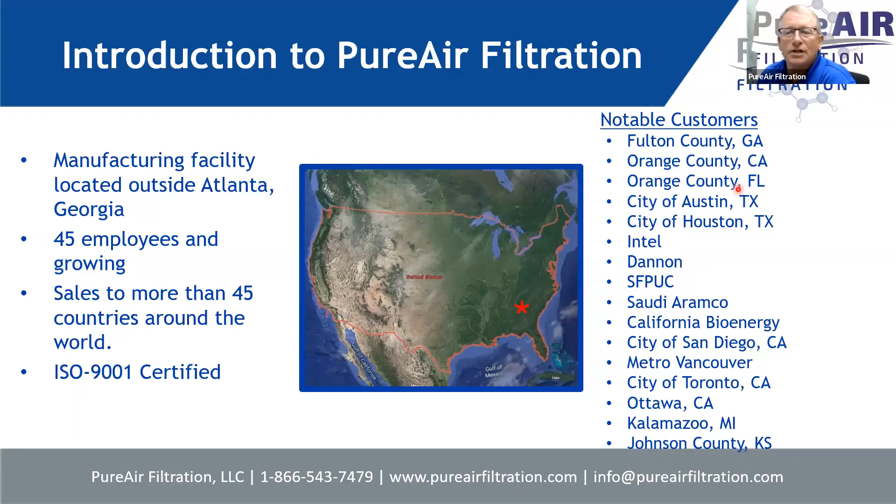Let's talk a little bit about what sets Pure Air apart: municipal applications, and we're not just odor control - we'll talk about that a little bit. We do odor control, and we do a few other things also associated with corrosion and emergency gas scrubbers.

Custom solutions - you can go from a very low flow situation, low capital costs, to some very, very high customizable systems, which we'll talk a little bit about today in the VTS unit.

Multiple families of specialty adsorbents. We do provide your basic coconut and coal activated carbons, along with many engineered carbons.

The conditioning of the air - we'll talk about that throughout the presentation. It's very important to eliminate, to take the majority of the moisture and the humidity out of the airflow. This really does help the longevity of the media.

Then there's the monitoring of the adsorbent consumption. It's another important thing to monitor, so you know when breakthrough of odors are going to happen, and it gives you chances to plan to replace the media when needed.

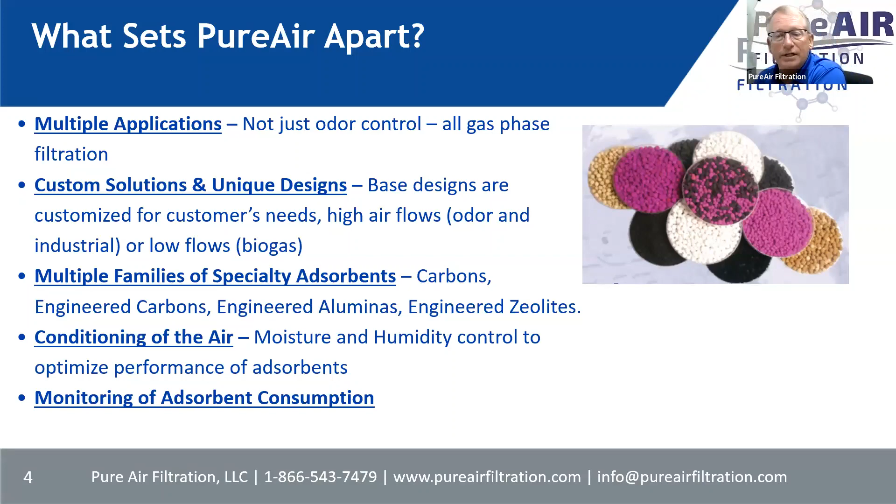Again, multiple applications - odor control, high efficiency complete odor control removal systems. We have multiple configurations. Today we're mainly going to talk about the VTS, but we also do things like emergency gas scrubbers.

Low maintenance - it uses a dry engineered media that actually turns into a harmless salt compound, because it's a chemical reaction when it comes in contact with the chlorine. Very important to have around to protect the surrounding population near the plant, whether it be a water plant or a wastewater treatment plant, and the employees of those plants.

Protecting electronics - yes, Pure Air does odor control. A lot of people think of H2S, and yes it has a bad odor, but it's also very corrosive. That's something else we do. We won't talk about that too much today, but that's how we treat H2S concerning its corrosiveness.

Indoor air quality - improving urban air. A good example is at an airport, where you don't want to be sitting there waiting on your plane, smelling airplane jet fuel. We will put systems at the intake of the HVAC systems, and it will take the offensive odors and smells out so that people inside the facility don't smell it - in this example, jet fuel.

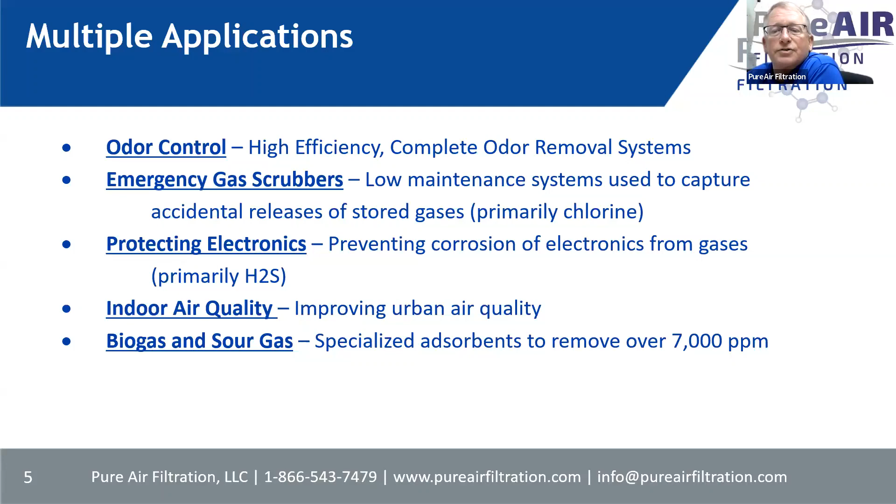As far as gas phase technology - this is in the gas phase, it's in the air, not a liquid phase where you're trying to filter certain things out of drinking water. This is gas phase: removing molecules of gas from the air is what we're talking about.

Here's some of the more common gases: your hydrogen sulfide, sulfur dioxide, chlorine, ammonia, and other VOCs.

This is an example of a media bed, and the media expires in zones. Here's where the contaminated air is coming in. Envision this is the media inside one of the vessels. You've got a spent area, an active transfer zone where adsorption or chemical reaction, the chemisorb, is taking place, handling and eliminating the odors. And then you have your unused portions. This gives you a little diagram of what's going on inside that media bed.

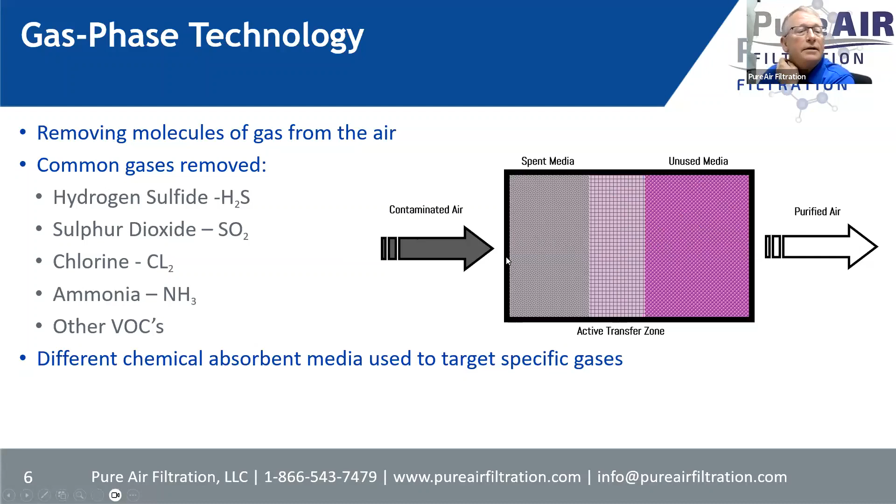Many different types of engineered medias, along with our PureAir ACX, that's our coal-based activated carbon. And here's the ACC, which is the coconut.

These are some engineered carbons where we use alumina spheres treated with potassium permanganate, whether in its pure form or blended with another type of media. This is normally what we use in what we refer to as a polishing layer, that gets rid of all the odors associated with wastewater, other than the H2S. So that's what those are mainly used for. You can see we just have an array of different engineered medias for different situations.

This is a quick visual of some carbon, and you can see again very porous. What happens here is that the odors or odor molecules literally get adsorbed or stuck into these pores.

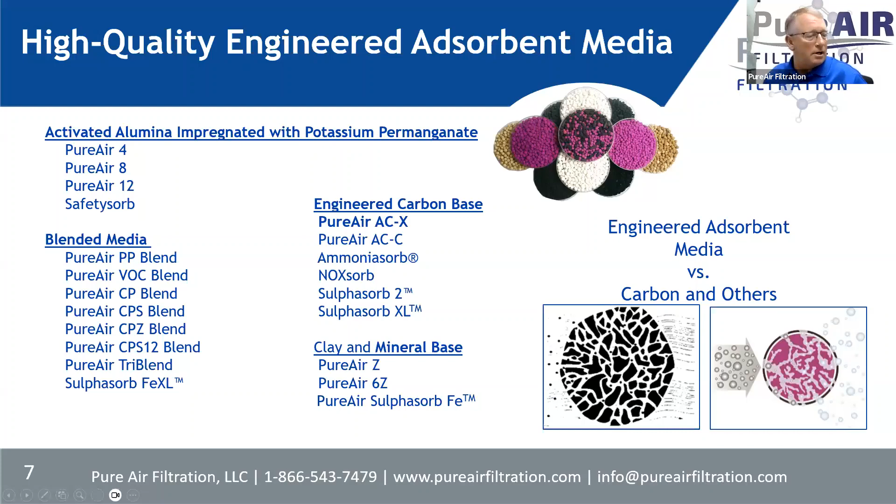This is actually an example of more of a chemsorb situation, where this is, say, an alumina sphere, very porous, treated with a chemical. There's a chemical reaction that happens when the odorous molecules go into those pores.

A little bit about carbon versus PureAir engineered adsorbents. Activated carbon is not UL approved. It treats humidity, water as a contaminant. Basically what they're saying there, those pores can get filled with humidity or water and leave less room for the actual odor molecules to be absorbed.

It is a reversible process. If you get a high temperature for any reason, or a high spike in H2S, which a lot of times is caused by high oxygen, the molecules can be pushed out, and then you end up with odor breakthrough, and that's not what you're trying to achieve. It's not the end result you want with odor control. So that can happen with your regular activated carbons.

It can be hazardous waste when spent, a little harder to get to a landfill. It can catch on fire, it has caught on fire, and it's extremely difficult to determine media life. Say at a lab, something we do here at PureAir with no cost to the customer, we send in samples, and it can be harder to test and see what kind of results with just regular activated carbons.

The advantages of engineered adsorbent medias: it is UL certified, the system is designed for a broader amount of contaminants. You can see all the different types of media we have for all the different types of gases, which can be associated with wastewater and other industries. It is an irreversible process, and it's a chemical reaction, so it chemically treats and changes the chemistry of the odor molecule, either absorbing it or changing it.

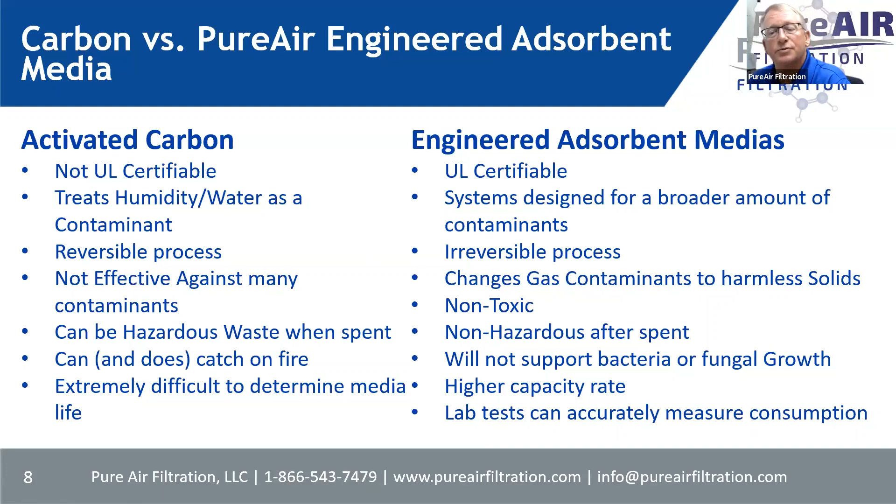This is the chart I was talking about, and it goes from everything from your coal-based carbon, which is your basic activated carbon, that's our ACX, to your coconut shell carbons. You can see the porosities, how porous it is, its ability to capture VOCs, reduce sulfur compounds, H2S, how it handles water, and then the cost per pound and the cost to actually use it when it comes to absorbing the H2S. You can see here where the activated carbon and the coconut activated carbon are great as far as being very porous.

Okay, VOC, very good, excellent. These things are great for VOC capture, but you can see where you get into some of these other things associated with a wastewater plant, the ratings aren't that great as far as H2S capture. It's just 5% compared to our Sulphasorb.

Where is our Sulphasorb? Here it is, our Sulphasorb. Again, up to 70% by weight. So you can see here we come over to the dollar amounts, cost per cubic foot. Yes, the regular activated carbon is less than the engineered carbon, our Sulphasorb XL, but the cost to maintain it and cost per pound to H2S is a lot less.

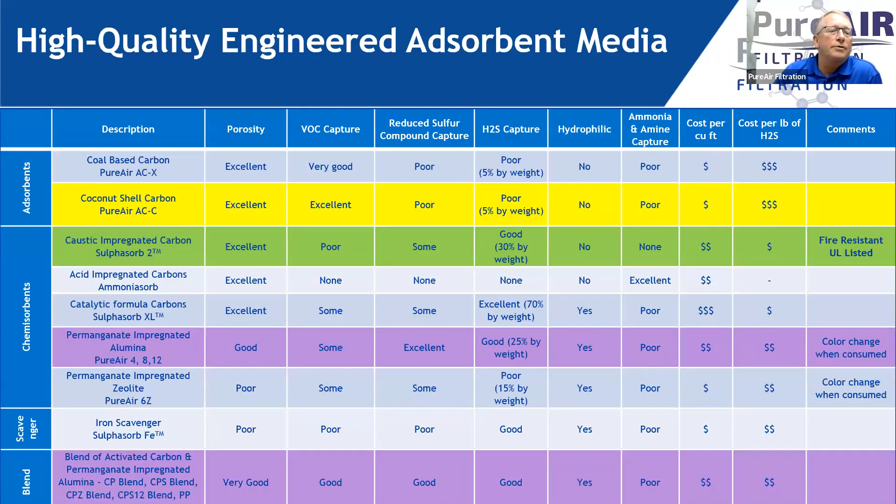So you're going to get again a much larger capture rate with the engineered Sulphasorb XL. That can equate to less labor when it comes to having to change out the media because you don't have to do it as often. So those are some other things you really need to think about when purchasing or coming up with what type of media you're going to use in your situation.

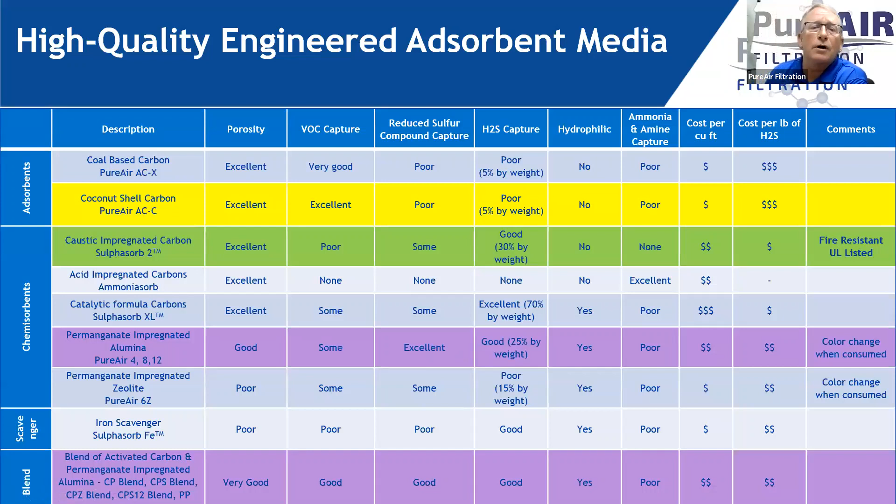But again, this goes over just talking about the potassium permanganates that I was talking about using for our polishing layer. We use the Sulphasorb for roughing, mainly going after the H2S. With permanganate and the blends, we're going after the other odors associated with wastewater. You can see that they're very excellent at the reduced sulfur compounds. That's what we're putting them in there for, again, a polishing layer of media.

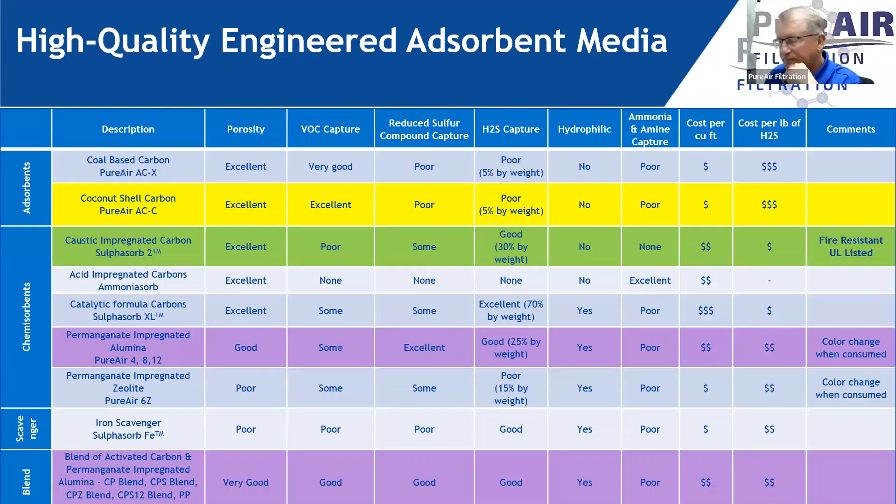All right, now we're going to get into talking a little bit about the V-bank transition system, or known as the VTS. See some top view and a side view of a system.

The systems have the highest airflow system to remove 99.5% of unwanted gases from the air. Again, you get a very large flow through these units, but then consistently still get that 99.5 and more capture efficiency that's needed and that's specified.

Also, high efficiency horizontal airflow configurations made for spaces with limited height, but again, need that high airflow. For one reason or another, you don't want your neighbors to see these tall 20+ foot tanks at your facility, and you need to handle some very high flows. That's kind of what they're talking about.

This is great for certain situations as far as the footprint of this system. It's also not as high as a vertical system would be. So safety, when it comes to working on this and changing out the media, comes into play. We'll talk about that here in a little bit.

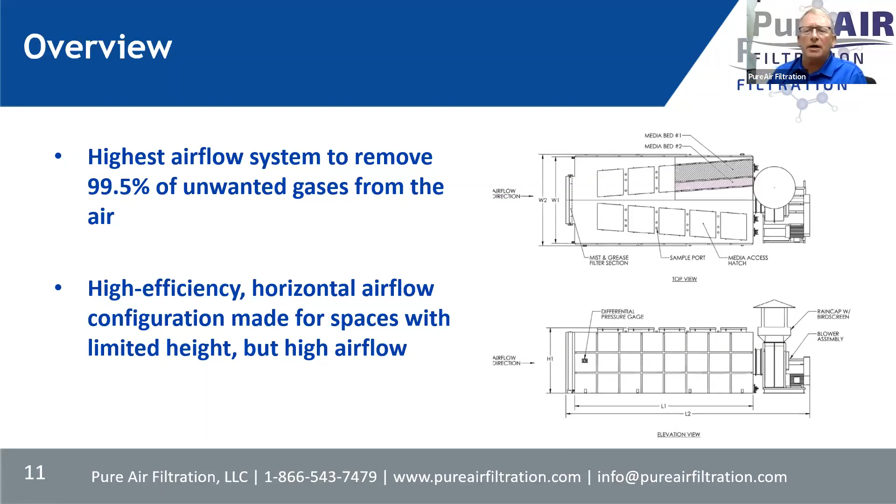Construction of materials: FRP is standard in municipal situations, stainless steel more so in industrial situations. Mist and grease eliminator is standard in municipal, but again, you're trying to get as much of the moisture and humidity out of the airflow, and the particulate matter, to increase the longevity of the media. So again, very, very important.

Then we're going to talk a little here about blow through versus draw through. We have a blow through system. I think next time I do this presentation, I'll have some actual examples of a blow through and a draw through. With the blow through system, you're literally pulling the air from the odor source and blowing it into the vessel. If you have, let's say, a gasket or dairy seal or something along those lines that's failed, you're going to be blowing out air, so you're going to get odor breakthrough, which again is not a good thing when it comes to odor control.

If you have a draw through unit, you're actually creating a vacuum through the vessel. So if you have that same air leak, say at a sample port or something like that, you're not blowing contaminated air out into the atmosphere. You're just actually pulling in or drawing a vacuum, so you don't have that odor breakthrough. That's where a draw through just seems to be a better concept a lot of the times with an odor control system.

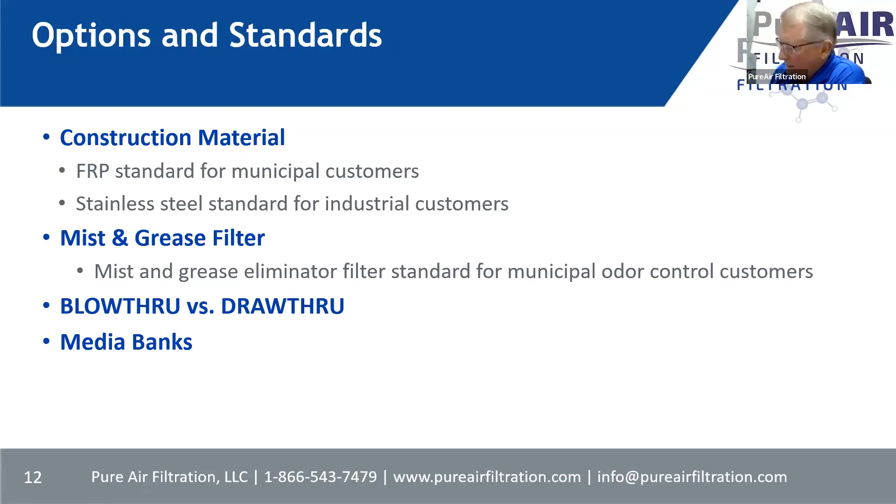This is actually a paper that was done for the Hyperion water reclamation plant out in California, done by some well-known individuals in the odor control business. It ended up being printed in the WEF Water Environment Technology magazine back in October of 2022. We'll show a little chart here in a minute, but the best choice for the situation at the Hyperion wastewater plant was a V-bank system, or VTS, or horizontal flow, high flow VTS system.

You can see here all the different kinds of technologies that were taken into consideration. There's a vertical flow single bed unit, but the problem with this one is it's low flow - you just can't get that much flow through, or not as much as needed at the Hyperion plant. Then there's a horizontal flow dual bed, but again the functions were just not quite what they were looking for, or the best footprint or best fit for the Hyperion system.

So we come down here to the V-bank or VTS unit, which is the one that was chosen for this situation. You can just see it checks all the boxes here - very high flow, compact especially when it comes to height and width of the system. Excellent as far as media life, moisture management, again due to the slant in the vessel itself, and of course the mist and grease system. Ease of changing out the media is very, very important, and good access to it - those kind of go hand in hand, very simple.

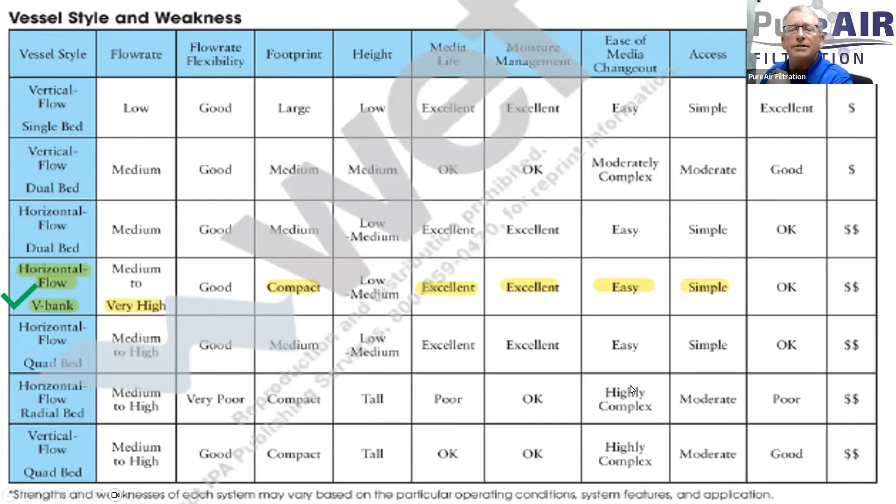But if you go down here to some of the other technologies that can handle the high flows and were candidates for this type of situation, you've got your radial flow, and you check out a lot of the boxes here - high flow, but it's real tall, 20 plus feet tall. You're not always good neighbors, you might not want that situation. Coming back to media changeout, it's highly complex because with radial flow the media bed is as long as the system is tall, so it's a lot harder to change out the media. But again, this paper did a study of all the different systems, and this one checked all the boxes for this very high flow situation and footprint at the Hyperion plant.

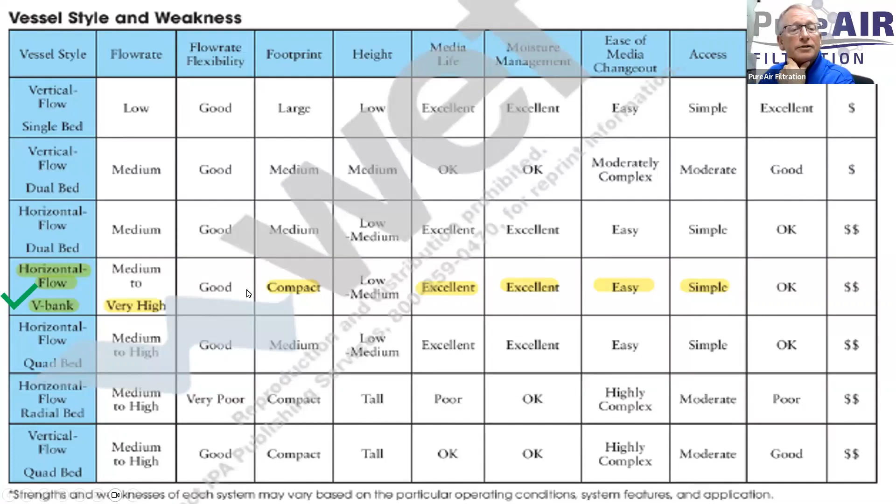The benefits - let's see, benefits as far as airflow. We've been talking about it already, but the ability to reach high airflows, standard units up to 42,000 CFM. It does not require air to - basically talking about the angle that it goes through the system. A lot of systems take almost a 90-degree angle from the blower to the inlet, then up through the media and up to the exhaust. With a gradual slope of the V, it's not as much of an angle.

Vastly superior to radial flow and dual bed vertical beds, just like I showed on that chart - kind of the reasons why. But those are usually your other candidates when it comes to very high flow wastewater odor control systems.

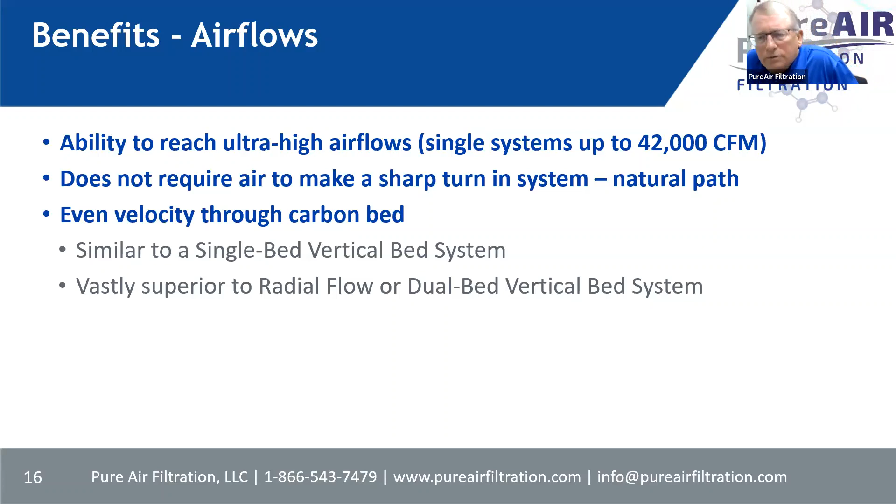That's the benefits again due to footprint. I know the mist and grease is basically built into the front of the system, so you don't have the mist and grease protruding out, which is nice. These systems basically come on what I'll call an integral skid, so everything can really be put into place, and then you can just connect the incoming ductwork. It's very easy as far as the footprint of these, the installation.

Again, the V-bank transition systems are engineered for tight areas - big cities, or we even have situations where they bury these things underground so they're not seen, out of sight out of mind. No side access needed, which allows you to bring the units closer together because you don't have to do any maintenance or need access to the sides of these systems.

High efficiency horizontal airflow configurations for spaces with limited height, but very high airflow - whether it be you're trying to be a good neighbor and you don't have people complaining about seeing these new big tanks down the street. That's one of the many reasons. Again, it's a footprint issue.

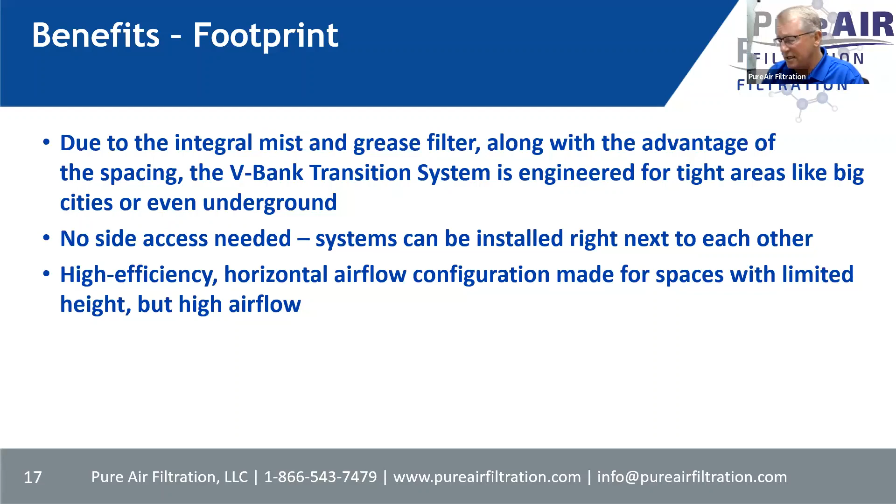Okay, so let's see. Benefits: broad range odor removal results.

Very customizable, I've already talked about it a little bit earlier. If you're in between flows, we can customize these systems by extending the length of the bed or extending the height of the bed. That's what they're talking about here.

Able to take out contaminants, not just one gas. Also, the beds, we have the ability to put two different types of media in the bed.

Like I was talking about earlier, you might have a roughing layer of media, like our sulfurs or high H2S capacity carbon, engineered carbons, and then on the next layer would be a polishing media to get rid of the other gases associated with wastewater. That's what they're talking about there.

And this is between what I was trying to say earlier, between standard flow ranges, we can customize these systems to fit those flow ranges.

Again, the high efficiency mist and grease. It is very standard in our systems to protect the media, gives particulates and moisture, and just prolongs the longevity of it.

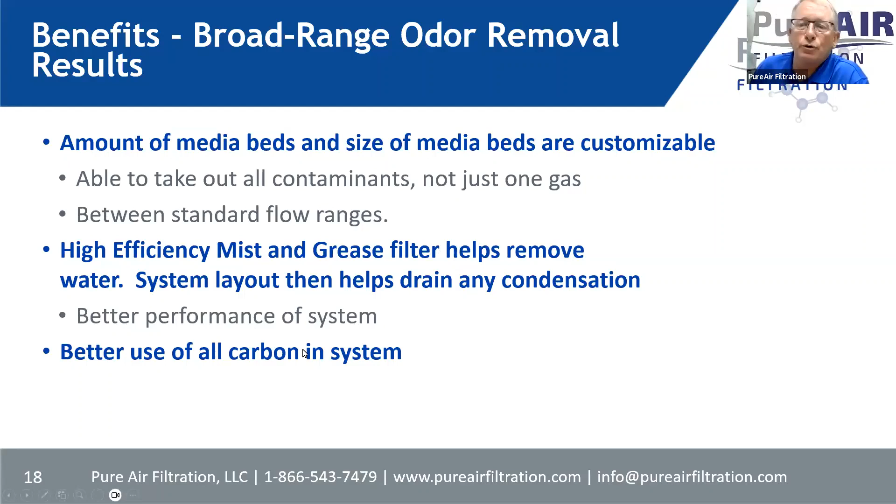So again, better performance of the system, better use of all carbon in the system. Again, very even flow through those V's, which allows for this.

Maintenance. Again, this is a big advantage with the VTS units. Due to the height, due to the flat surface on the top of this vessel, it's very easy to get around on and to maintain.

This is just talking about changing out the media, and it goes through the steps: shut down the system, connect vacuum truck to the quick connects at the base of each media bed, which is very easy.

Again, you don't even have to get up on top of the unit, just connect to the base of the carbon bed or media bed with the quick connects that go to the vac truck. Vacuum until carbon no longer exits. Repeat for the other beds.

Another nice thing about this system is that any remaining carbon goes into the fill chute. So really you have two options when pulling the media out: vacuum the media out of these systems, or fill media through the fill chutes.

Again, getting up on this unit, it's a nice flat surface, as you can see by the previous drawings of it. Close the lid.

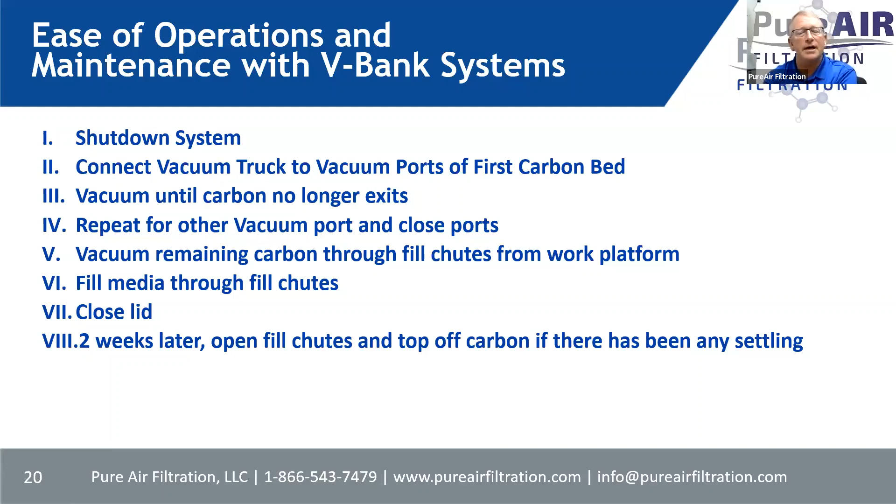Here's some references. This is a gentleman out in Fullerton, California, from a company, making comments about the ease of dealing with the VTS. I'll just read it out.

The VTS tanks are safer than dual beds when it comes to rebedding or changing out the media, due to the fact that you do not need to enter the tank. When you need to enter a tank, say in a dual bed vertical system, to change out the media, you're going into confined space, and there are rules and regulations you have to abide by when doing the media changeout.

It is also easier, faster to vacuum the VTS tanks. Again, using the quick connects at the bottom of each bed. And there's also a good safety measure to never enter the tank, especially concerning confined spaces, and it is true.

Here we have many of the engineers that specify our systems. You can see them there: Stantec, Parsons, Hazen and Sawyer, CDM Smith, AECOM. Again, the list of some of the major engineering firms that specify our VTS systems.

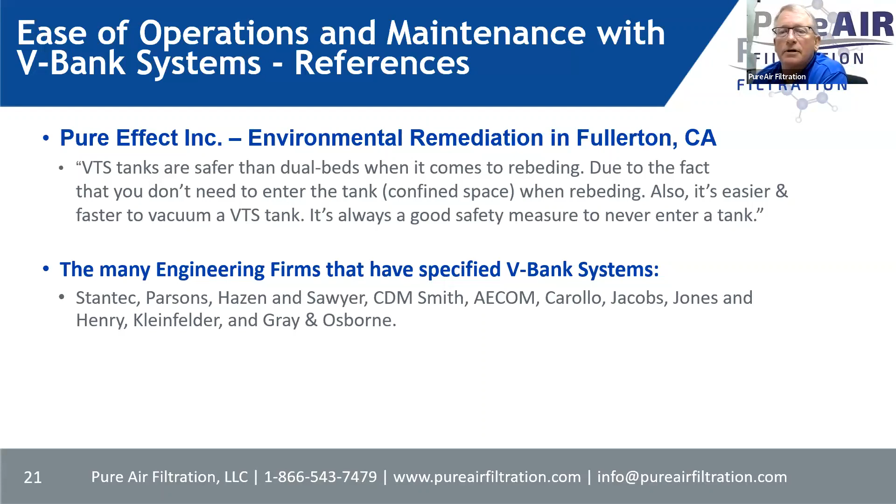Configurations: I think I mentioned earlier, we have what we call a half V and a full V. This one is for lower but still getting to your higher ranges of airflows.

Again, we have an industrial airflow range and a municipal airflow range. The difference is, in an industrial situation, using H2S as an example, there's usually lower concentrations, so you can go up with higher feet per minute. With municipal, you want to stay more in the 50 feet per minute range, up to 75, but 50 to 60 is usually the sweet spot. So that's just showing the half V configuration and what it can do.

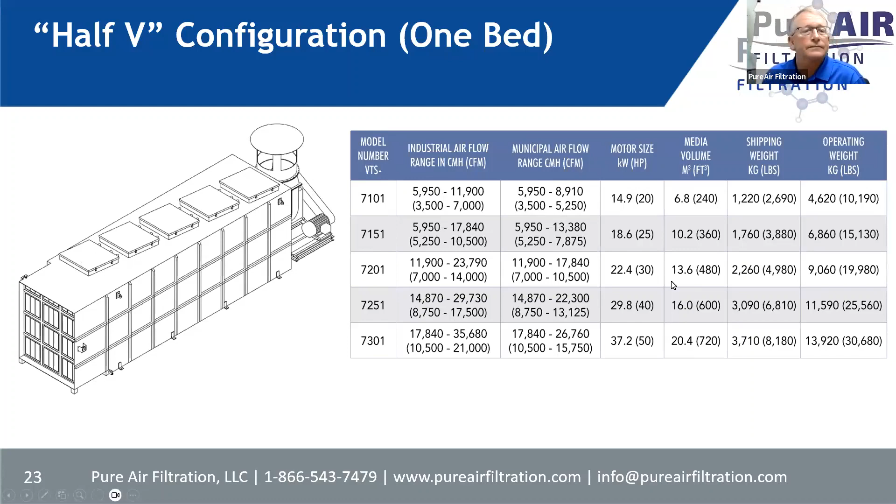And here's the full V, for even higher flows, talking about the mist and grease and the way it's built into the system.

This is obviously your incoming flow, you have your blower, and it all sits on its own frame, where this unit can be picked up as a whole and placed and then ducted to. Again, this is just showing you what the full V looks like and what its flow capabilities are.

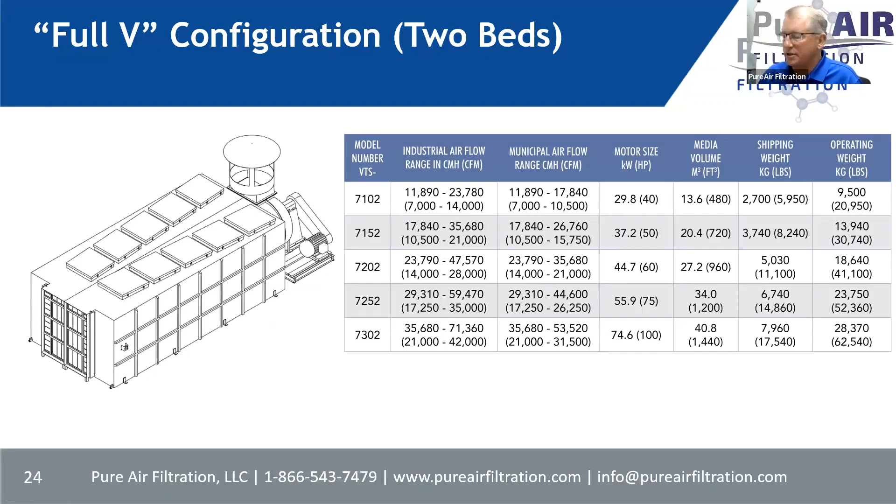You're showing the actual internals of the full V unit. Here you've got your plenums, even plenums in the front and back, and that allows for an even flow through these media beds. Of course, these are your media beds, and they actually have two sections, where you can have two different types of media that can be changed at different times because they are divided by a screen, usually a poly screen and a frame. Again, this just shows you the even flow and the way the flow goes through a full V unit.

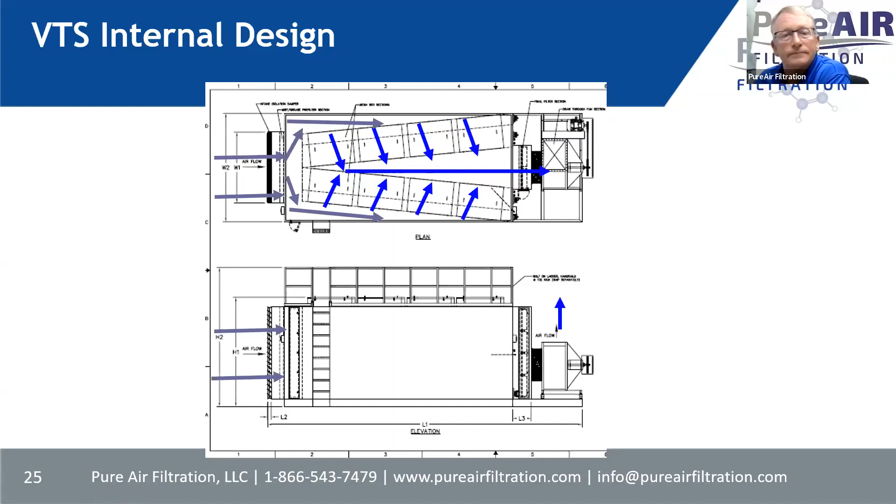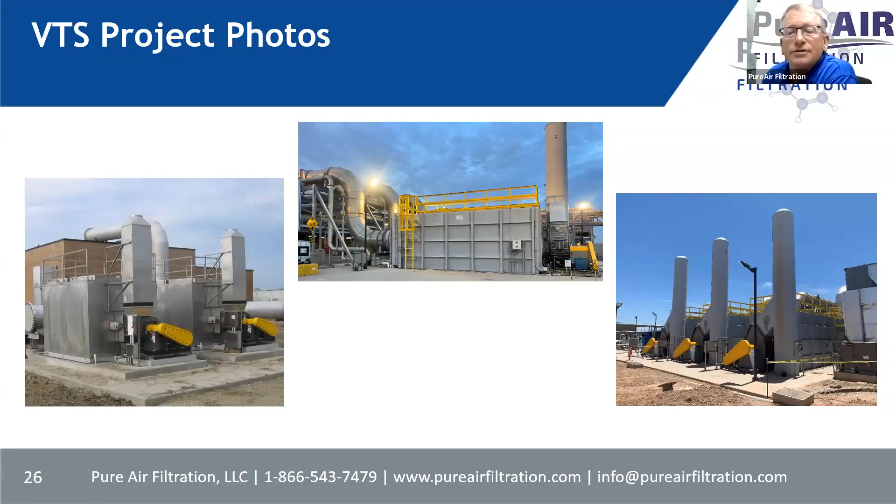Let's see here, V-Bank transition systems case studies. This one is in Saudi Arabia, at an oil refinery, and they're actually using what we call a scavenger, a very high capacity by weight H2S media that they've taken advantage of in this situation. They have very high flow and multiple pieces of equipment, and you can see two of them are VTSs, or V-Bank transition systems.

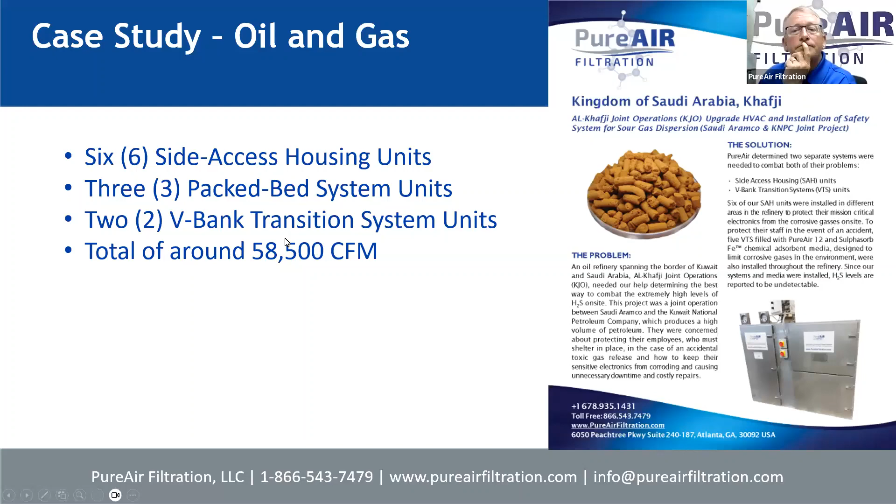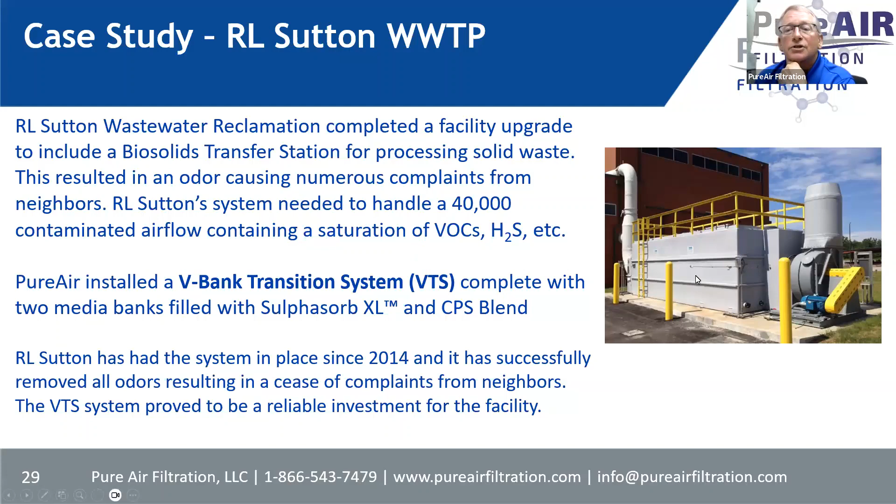This is a system at RL Sutton Wastewater Treatment Plant in Cobb County, Georgia. RL Sutton plant has a central sludge processing or sludge dewatering complex, people call them biosolids nowadays, but dewatering. They have a bunch of centrifuges there, and they bring sludge from all the other plants to this one main plant, so they needed some odor control for it. It's a large facility, so the VTS, with very large flows, makes a lot of sense instead of having multiple systems with a lot of interconnecting ductwork and multiple blowers. You can do it all with one VTS system. That's in a nutshell what's going on at RL Sutton.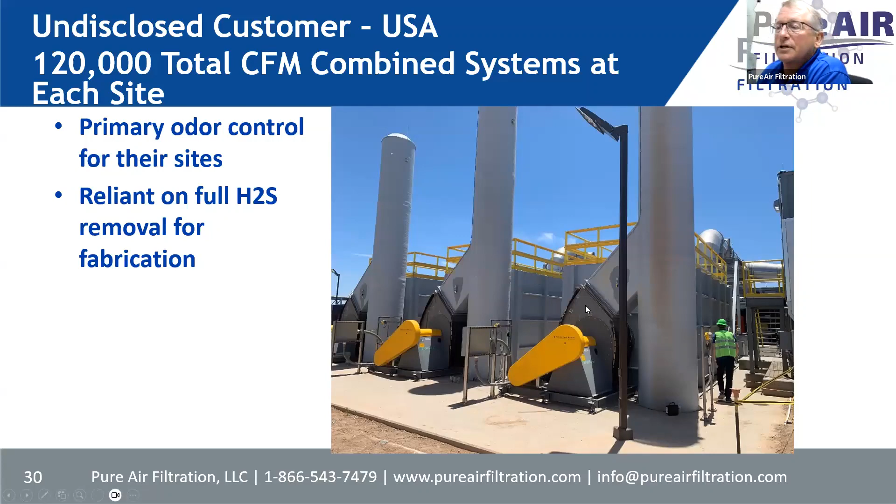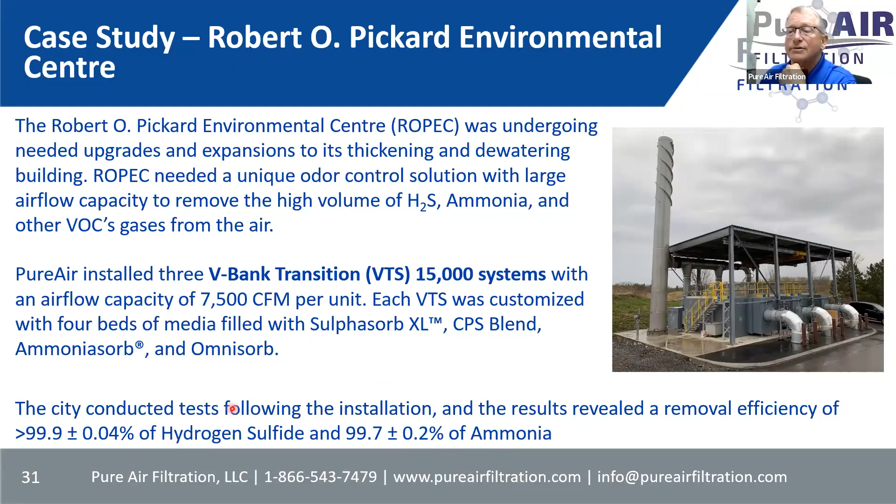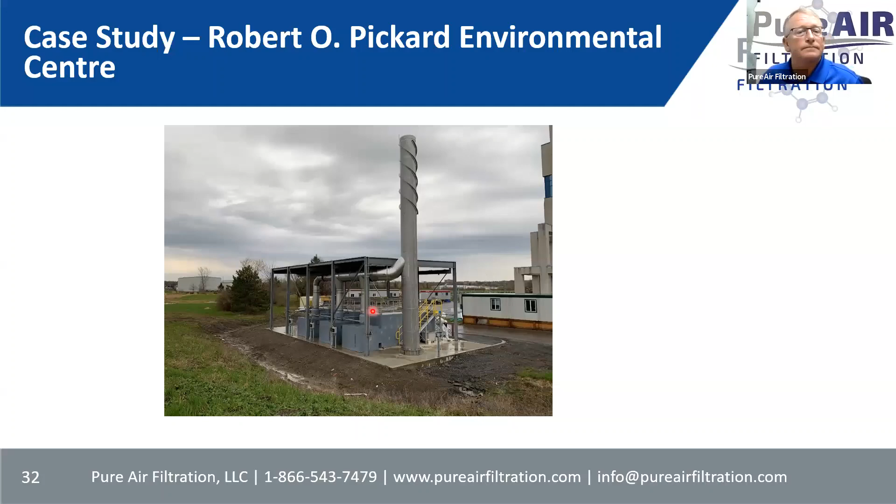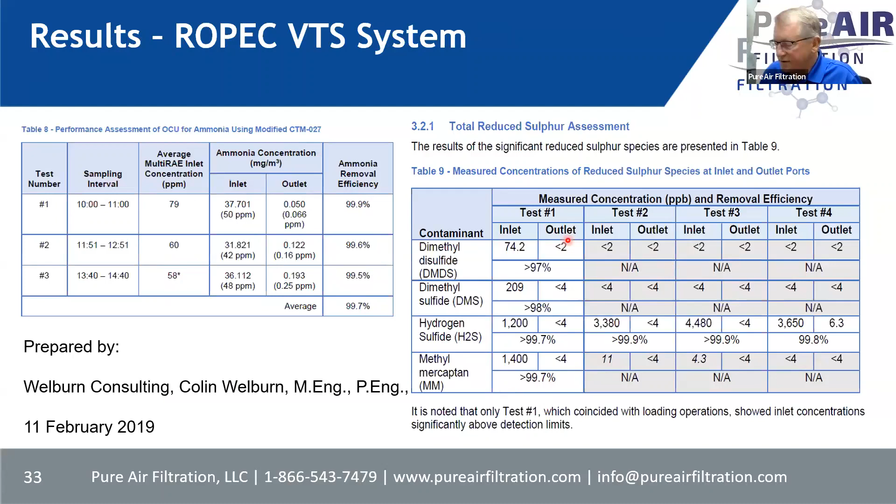Let's see why PureAir design is superior. Again, the special design features of PureAir - we've already been talking about a lot of this, but specific medias for needed applications. Many choices when it comes to medias to deal with the types of gases or odors in a particular situation. The vacuum ports we talked about, for ease of media removal.

I-beam supports for strength, and again very strong - I-beams are a lot stronger, and you can point them out here in a minute. Again, mist and grease, very important, already talked about it a few times - get the moisture and particulate out of the airflow. Proven track record, over 30 VTS installed, 10 more purchased this year alone. Again, just an overview here - high efficiency horizontal airflow configuration, made for spaces with limited height but high airflows. It's the best thing about its footprint.